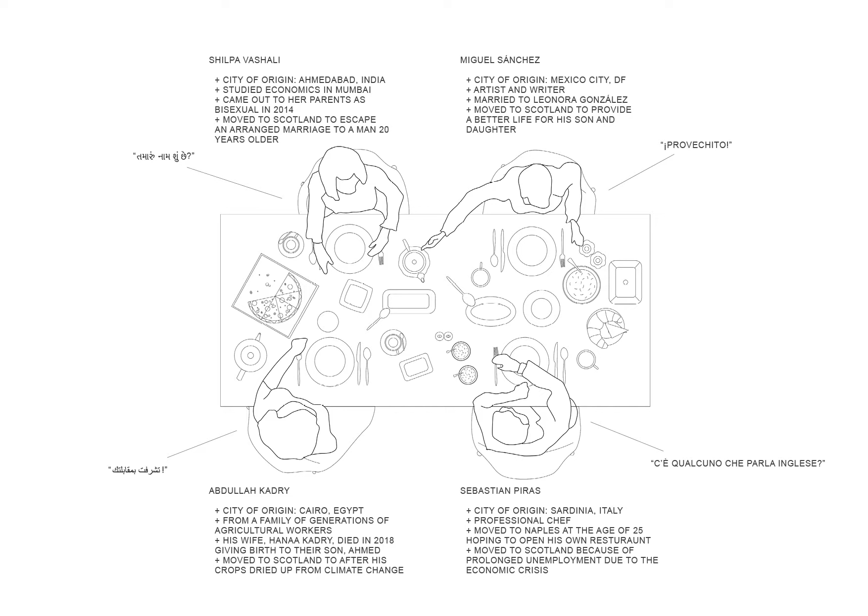To further structure fiction as a device for the design of architecture, I introduced 4 protagonists immigrating from 4 different places to the site in Scotland. The 4 characters represent the way globalization has impacted immigration in the world today. With advancements in the way that we travel, the migration of people has also advanced. Migration now takes place more than ever, and also for numerous different reasons that vary from cultural oppression, to a better life, to climatic disaster, to economic crisis.

While the places and reasons that these migrants are coming from may vary, the thing that they share is where they are arriving. In this brief, that place is located west of the city of Glasgow in Scotland, where if we follow the ScotRail to its terminus at Gourock and jump on a ferry crossing the mouth of the Firth of Clyde, we arrive at the town of Kilcreggan.

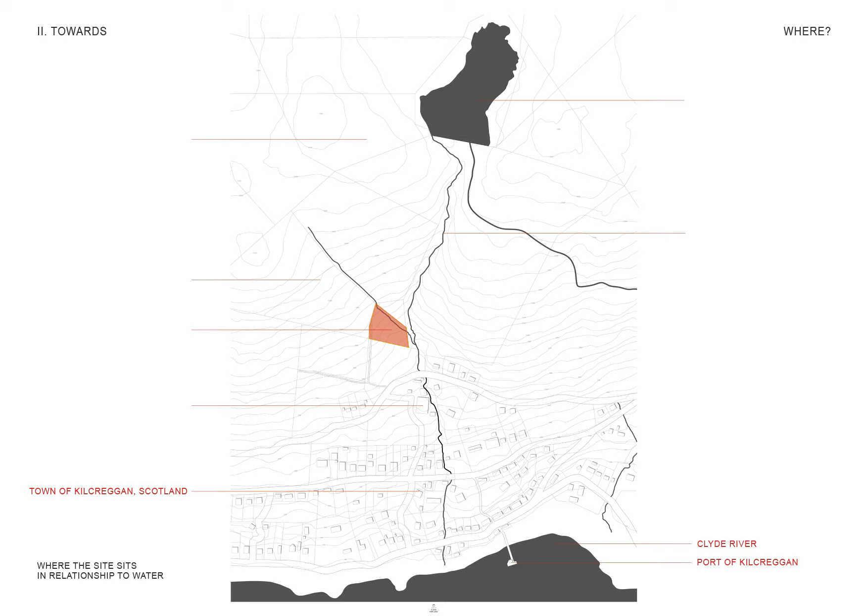Historically, in the 40s, the town played its part as an important naval town, sitting at the opening of the Clyde, where ships would pass to reach the port of Glasgow, and eventually the city of Glasgow. Zooming in, we can see the site's relationship to the town of Kilcreggan. Like many of the other towns that sit at the opening of the Clyde, Kilcreggan remained a small riverside community, largely occupied by agricultural lands that extend into the beginnings of the Scottish lowlands and highlands to the north.

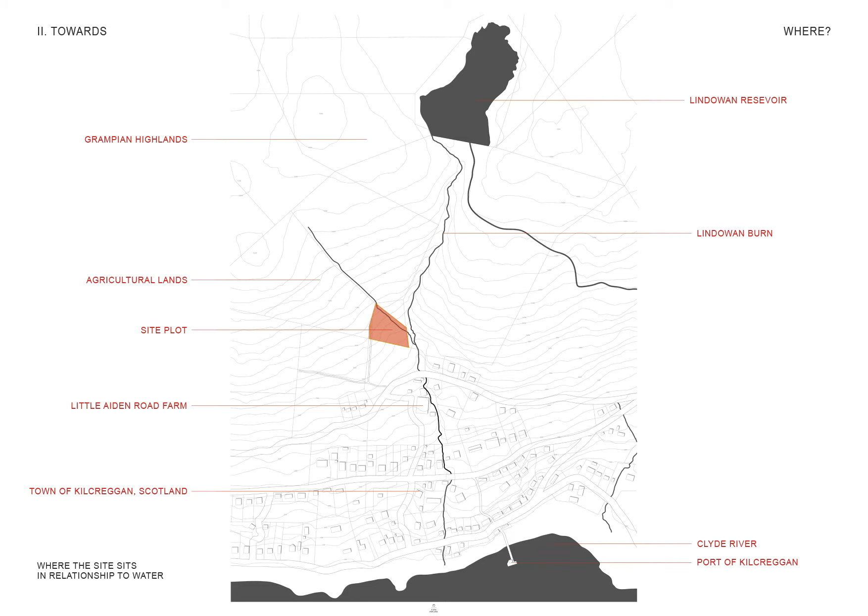As a story, the architectural proposal is centered around the mutual relationship between the migrants and the Little Aiden Road farm that owns the land that the migrants will build on. As a brief, the project uses the arrival to an agricultural plot to engage with an alternative to current modes of immigration that normally work in response to strong influxes to cities, where the architectural discussion and proposals are largely reactionary.

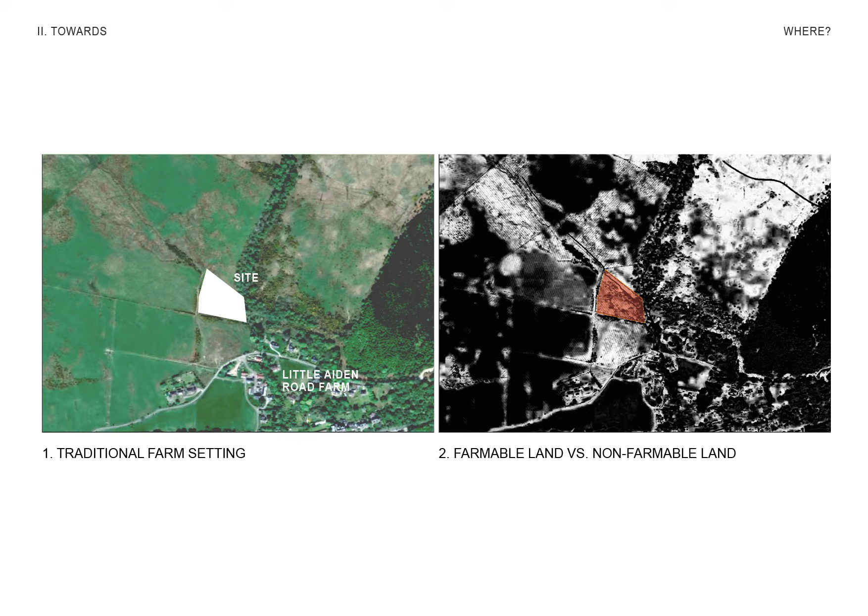This project diverges from that idea by creating a working relationship between the migrants and the farm they're arriving to. As the migrants add to the labor force on the farm, they are then offered a space on the farm's land that has become unoperational over time. In the traditional farm setting, land commonly loses its agricultural productiveness due to soil degradation, and while these lands are no longer farmable, they can become useful places for displaced people to land.

My investigation into the site began with a technical study of the geological diversity and richness of the Scottish lowlands and the architectural manipulations of resources from the land, resulting in a study that explores the materiality of stones, from traditional Scottish drystone walling to contemporary methods of working with the material.

Part of investigating the site, much like the brief, became personal. In one instance, I decided to actually enter into the picturesqueness I found in order to get to know the Clyde on a one-to-one scale, where all of its beauty and emotion are replaced by the reality of the cold and visceral experience of its waters.

Chapter 3. Love. My approach to the project began with the idea of an architecture built upon love. I looked at love through a historical perspective, from Plato's Symposium on Platonic love to Rilke's psychological explanations through poetry, before moving on to how I thought love could be explained and understood.

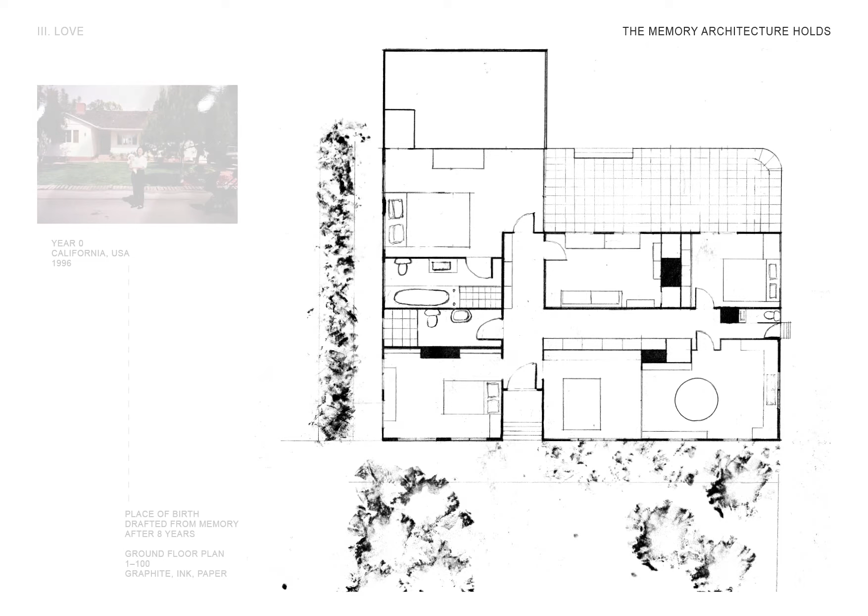One of the exercises I gave myself was to draw by hand the plan of the house I grew up in, in order to better understand how memories could impact an architecture being imagined, drawn, or worked on today. And as I continued to address the story of the 4 protagonists in my brief, in addition to giving these characters names, places they're from, and life stories, I went further to imagine memories for them, and it was those memories and the architectural expression of those memories that eventually had the biggest impact in allowing the architecture of immigration to come together in a harmonious way with its site of landing.

In the master plan, the coming together of these 4 migrants on a farm in Scotland can be seen sequentially. First is before. Before any new architecture, there is the expression of the land, which can be characterized through the dry stone walls that run through it, or the vein of the stream carrying water out towards the Clyde, not to mention areas of natural forestation providing an on-site resource for timber.

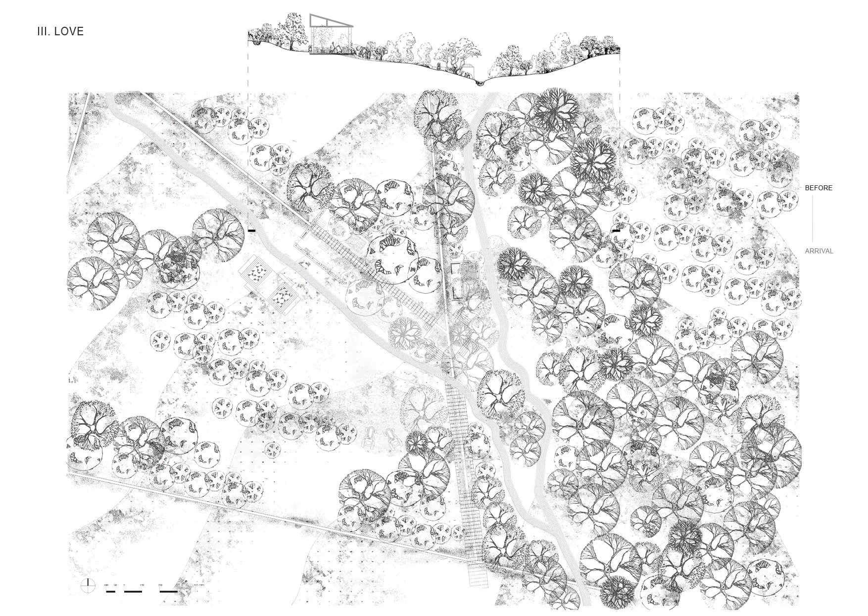Later comes arrival. The moment when these migrants are first landing on the site, they begin at first to build communal buildings like the shed and a water dwelling, and begin to create infrastructure to make it easier to arrive to the site by planning out some areas of land for tractors and trucks, and turning dry stone walls into roads. From one of the migrants' memories of walking the Mexican pyramids, where all paths for circulation are made from stones and mortar, as an example of how the memories of the immigrant were able to transform their place of landing by reimagining a wall that normally separates into a road that connects.

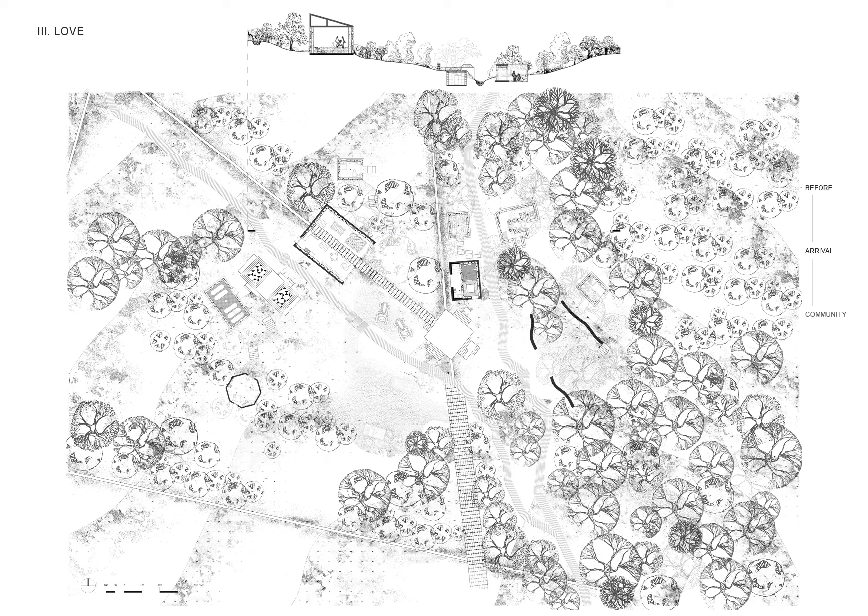Then comes community. Walls are coming up, initial shelters are being built, simple structures to start to actually be able to live on the land. And over time, the migrants are starting to form relationships with each other on the ground level. They're starting to engage with private versus public spaces, and spaces of comfort in a dialogue with man versus nature. The land is continuously changing in response to new architecture being built.

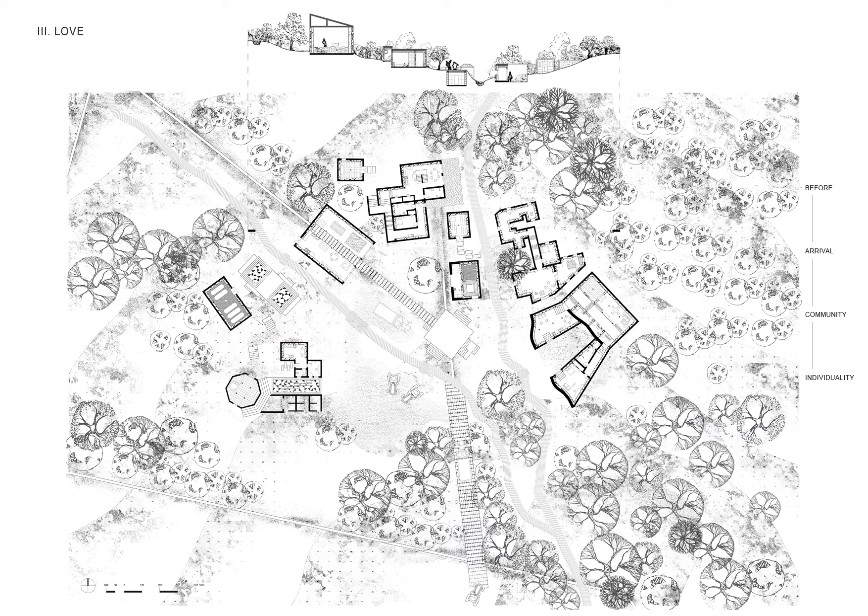Next is individuality, where cultural differences are beginning to show in the new architecture of each home. But still, there are moments where one house comes close to another and the beginning of a street is formed. The idea of permanence is being shown as buildings that were once primary structures upon arrival, where they once slept, are now becoming specialized buildings like altars and temples, because the migrants have now built more permanent homes.

After comes settlement, where after having lived in their new homes for some time, the architecture of these migrants extends past building just new homes. They're now starting to engage in sports and individual gardening and landscaping, even planning weddings in their backyard. And for all the timber that has been taken from the land, the residents are now able to strategically replant more trees in areas of new significance. And finally, future, where the story doesn't end with these 4 migrants, but continues as more people begin to arrive to the site and begin again the process of landing in a new place after being displaced.

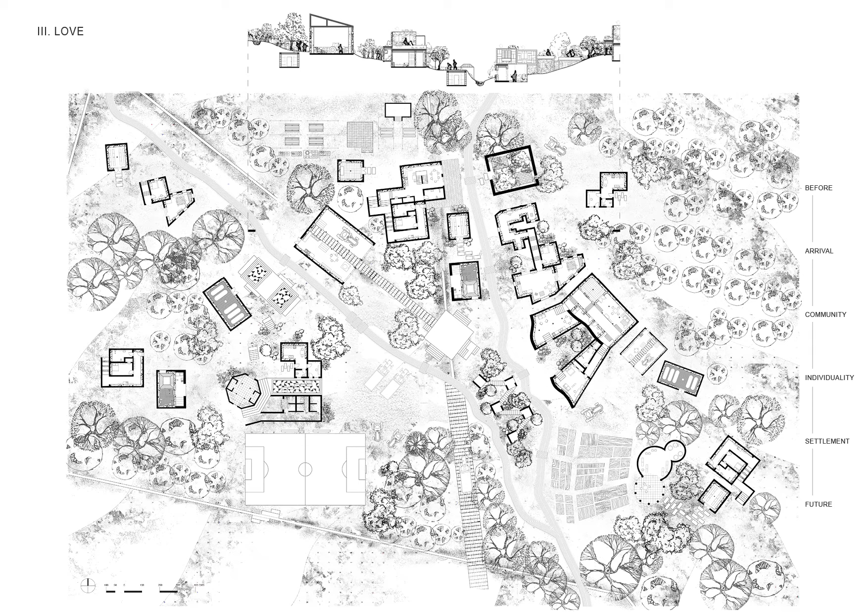The construction of these homes represents another form of the adaptation of multiple influences coming together. While they're insulated with straw bale coming from the host farm, they also utilize a traditional material characteristic of vernacular Scottish architecture, stone, to protect the interior timber framework and insulation from the Scottish climate.

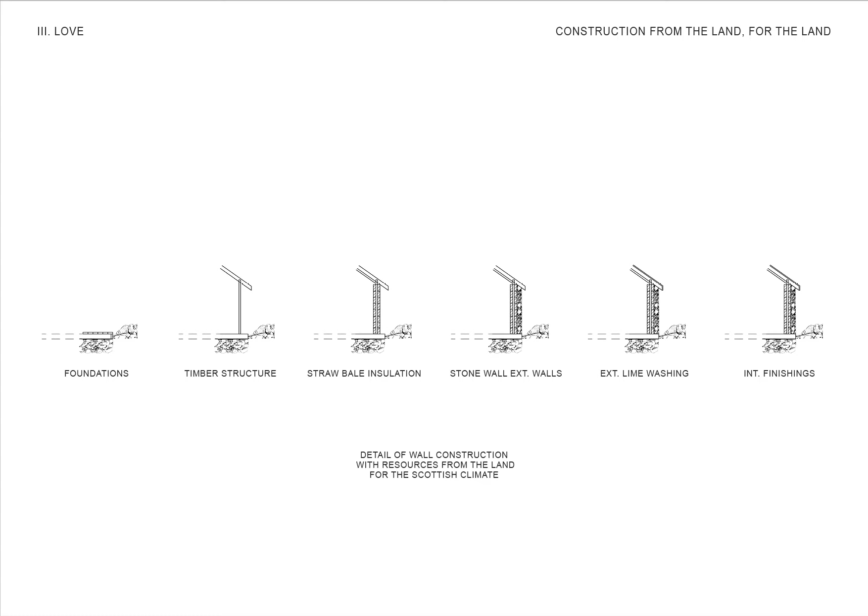The project does not propose a self-built community. It suggests that we take a critical look at the degrees of authorship that we as architects hold in a project versus the agency of the resident, and the proposed change to the current linear relationship of an architect willing to step back in order to let the direct effect of the engagement between semi-skilled residents and local and traditional experts take place, in turn indirectly allowing architecture to manifest as the architect provides a set of rules and tools to guide the project. The result is collaboration. I chose to take 2 of the protagonist homes into further detail as examples of how this type of architecture can manifest and begin to coexist within a community.

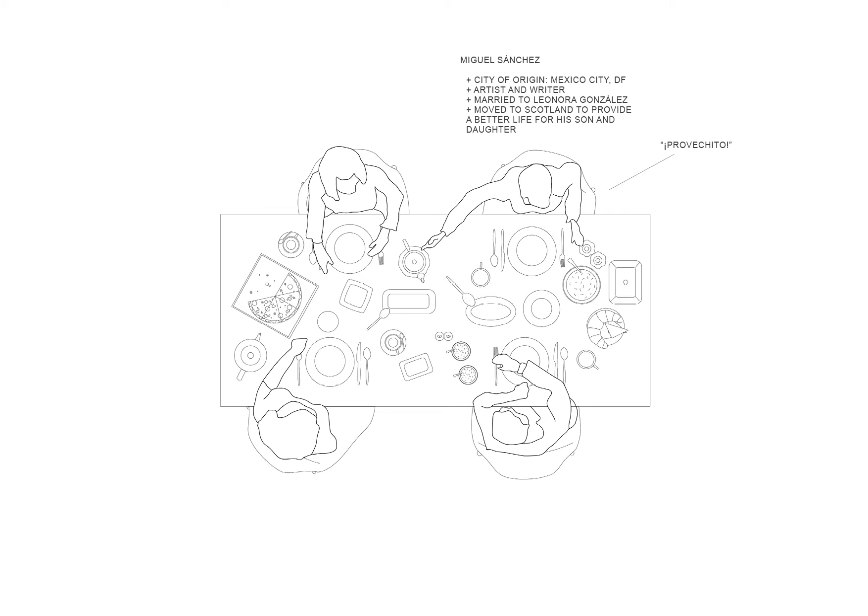First is Miguel Sanchez. He comes from Mexico City and is an artist and writer. He's married to Leonora Gonzalez, and they moved to Scotland to provide a better life for his future family.

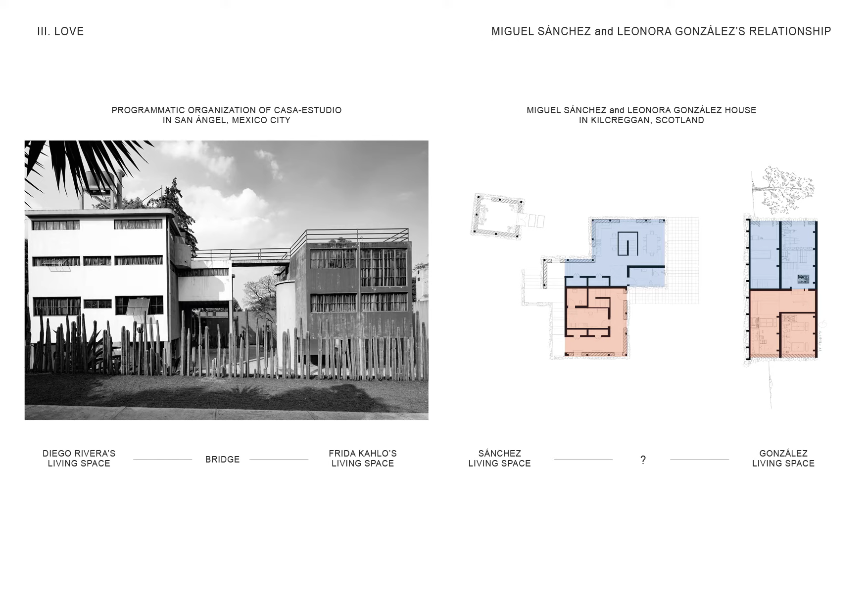The Gonzalez Sanchez house comes from Miguel Sanchez's memory of Diego Rivera and Frida Kahlo's house in Mexico City, which took the intense relationship of Rivera and Kahlo and expressed this architecturally between two individual volumes connected by an outdoor bridge. The Gonzalez Sanchez house takes this idea and seeks to transplant the same programmatic organization of that house into the Scottish climate, where an outdoor bridge is not necessarily possible.

On the ground floor plan, one can see that at the main entrance, the house splits into two separate living spaces. The outdoor bridge that could not exist in the northern climate of Scotland now exists as an interior space that both connects and separates the Sanchez living space from the Gonzalez living space.

On the first floor, differences in their personalities can be seen through the architecture. While the Sanchez living space is laid out in an open plan sleeping and working space, the Gonzalez living space is more traditional closed-off spaces. And while we see how the two living spaces are separated, we can see subtle moments of reconnection, like this interior window opening up into a double height above the kitchen on the ground floor, or in adjacent small balconies, allowing for small moments of intimacy.

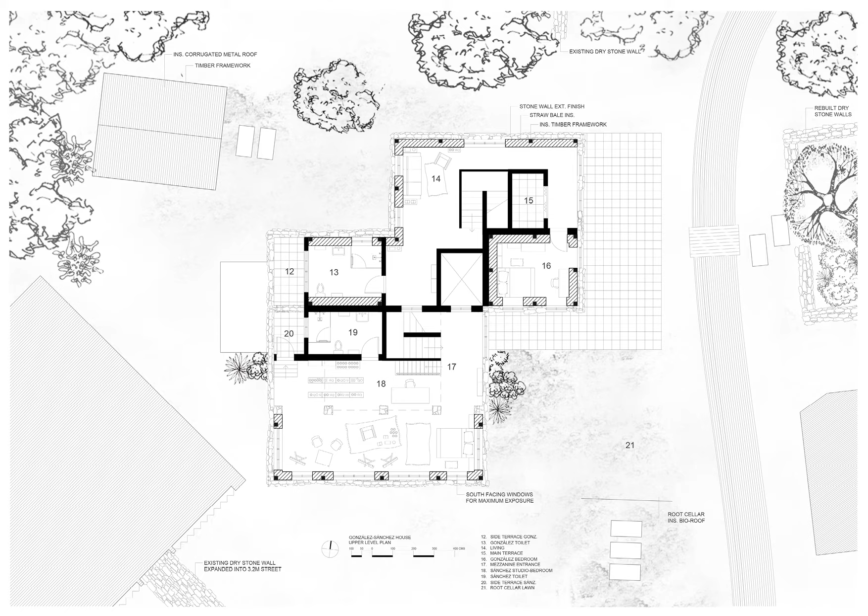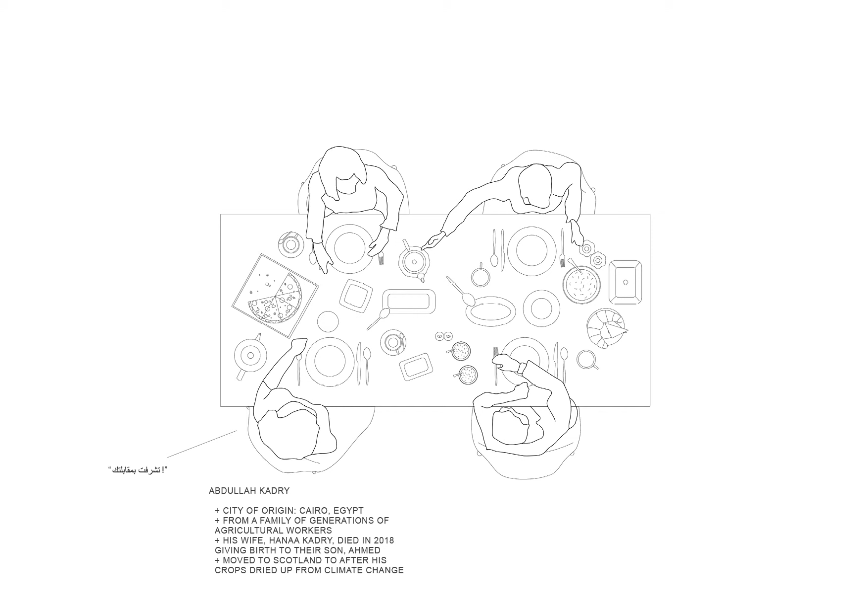The second character I went further into detail with was Abdullah Kadry, who's from Cairo, Egypt. He's coming from a family of generations of agricultural workers. He and his son moved to Scotland after his crops dried up from climate change. The Kadry house takes on the memories of Abdullah from living in informal housing structures in between the high-rises of Cairo and the fertile lands of the Nile Delta.

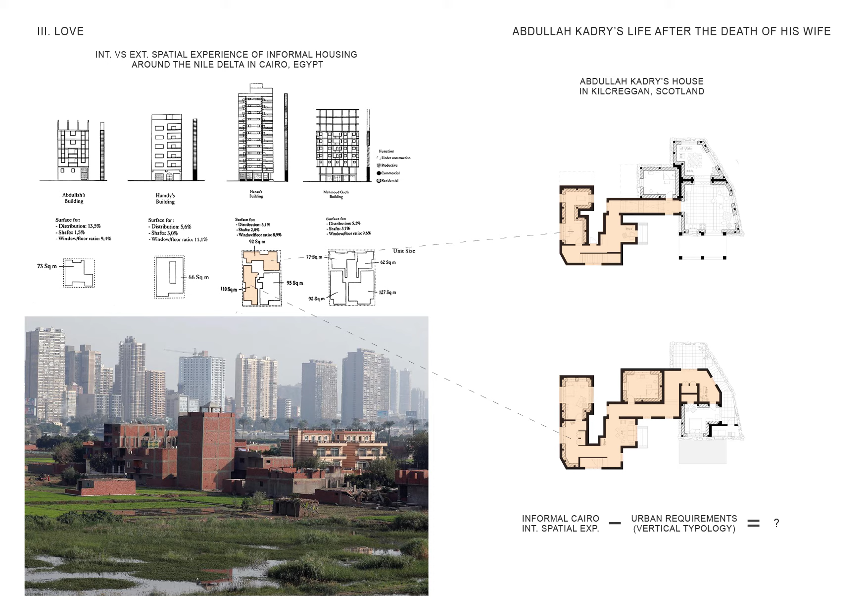While the interior spatial experience of these houses are usually geometric and full of movement, in Cairo they're normally expressed upwards in a squared-off vertical typology due to urban density. The Kadry house takes the memory of the interior spatial experience of these homes and implements it in the Scottish lowlands without the need to build upwards, allowing the house to leave its geometric forms as they are and connect with the land horizontally.

In the ground floor plan of the Kadry house, we can see how time has influenced the home. While the first part of the home is built with the same brickwork techniques as the informal Cairo home, later parts of the home are built with a technique that has been adapted from living on site for more time. The first floor plan shows how the outdoor plinths are covered with roofs to protect from the northern climate, and movement is constantly being expressed through transitional living spaces and the orientation of rooms in relation to each other.

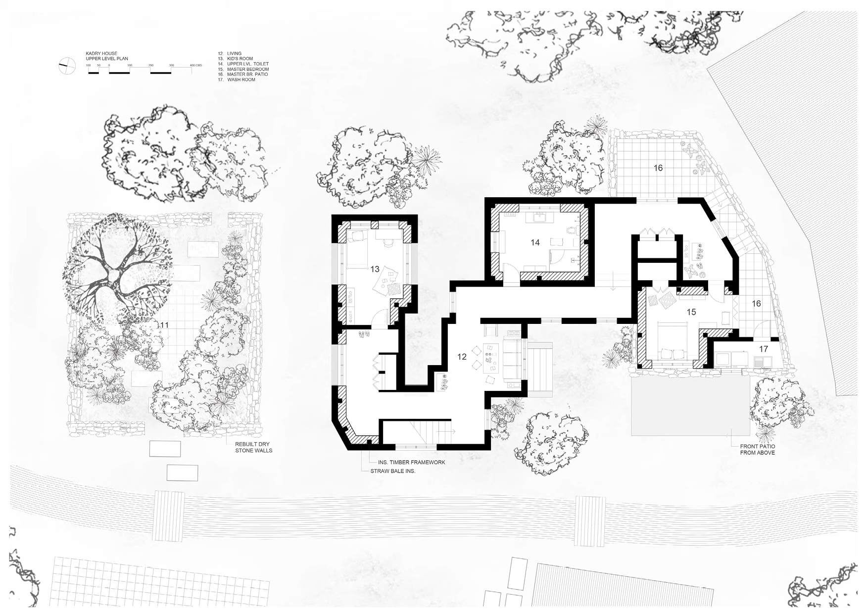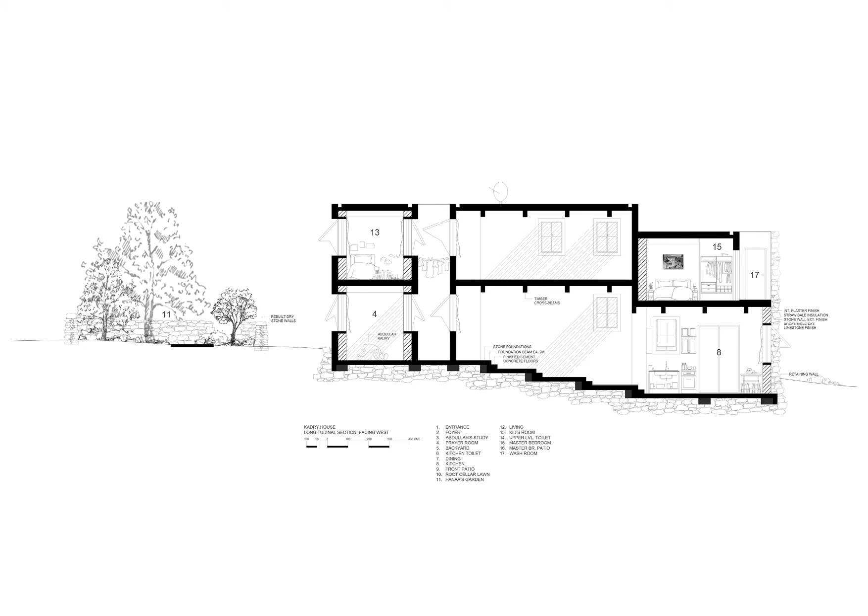The project led to interesting comparisons between differences within the architectural languages of other cultures. The Gonzalez Sanchez house represents the way Mexican homes are painted with vibrant colors on their outside, while the interiors are normally left white in order to reflect the vibrancy of the objects of the Mexican home, the textiles, the ceramics, the plants, all of the objects that end up reflecting colors onto white walls.

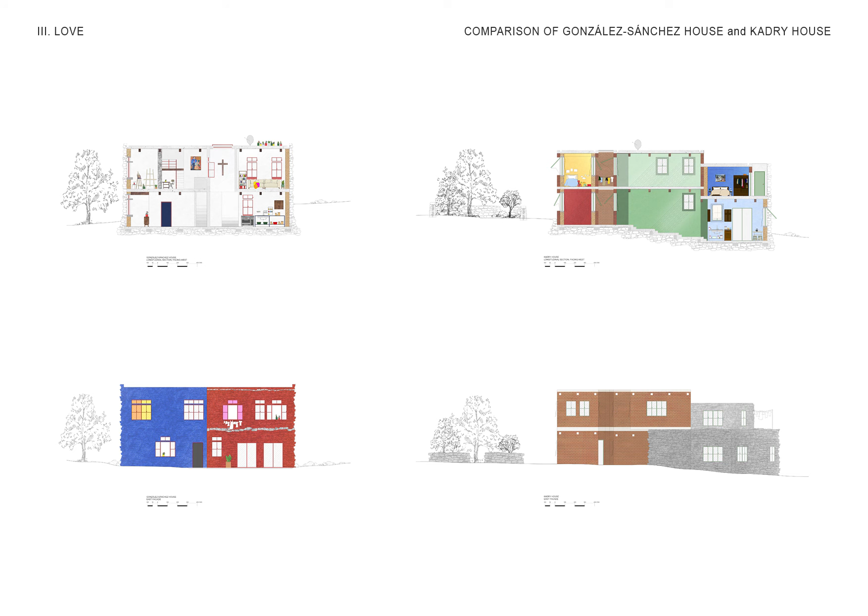This juxtaposes the informal Cairo homes completely, as their exteriors are normally a neutral red color due to the bricks being from the dirt around the Nile, while the inside is where the home is painted vibrant colors in order to express individuality.

As expressed through these interior views, the uniqueness of each house impacts the experience of looking from one house to another, and the parallels and differences of people coming from opposite ends of the world start to come back from architecture into the lives of people, so that they might get to live their love story to the fullest, so that they might look outside and dare to let their imaginations run wild, so that in the end, if we must depart, and we know we must eventually arrive, that the direction that we go in is forward towards love and forward towards home.